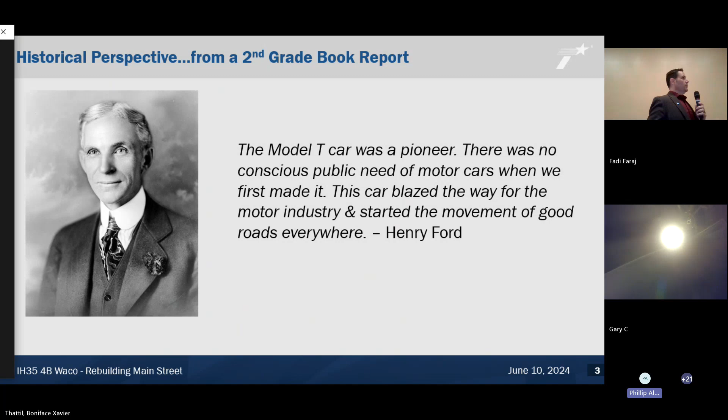So what does this have to do, what does Henry Ford, what does this book report have to do with Waco? Well, for me, my perspective has always been public side. It's been the pillars of transportation here, not only in Texas, but federally.

And if you look back in history, DeWitt C. Greer is regarded as the father of the highway system here in Texas, spending 54 years of his career working for TxDOT. Then you look at the Eisenhower administration in 1956 with the Federal Highway Act. Working for 10 years for TxDOT, I kind of leaned on the public perspective that these guys were the ones that really set the way for our transportation network.

But if you look back at Henry Ford, and at the Waco project specifically, the invention of the Model T had a transformative impact, probably just as great as those guys who worked for the government. Because the assembly line allowed folks to buy a vehicle back in the 1900s, it allowed them to do things they hadn't been able to do, like travel to places they'd never been, go on vacations they never thought possible, and in effect establish many more main streets across America than the railroad could ever do, or what horseback could ever do.

And that case is prevalent here in Waco, Texas. We took a trip there not too long ago to the Dr. Pepper Museum, and guess who pops up at the Dr. Pepper Museum? Henry Ford. Because of Henry Ford's Model T, the Dr. Pepper machine there in Waco was able to not only stay local, but used the automobile to distribute Dr. Pepper across the South, across the state of Texas, and turn into a very powerful company.

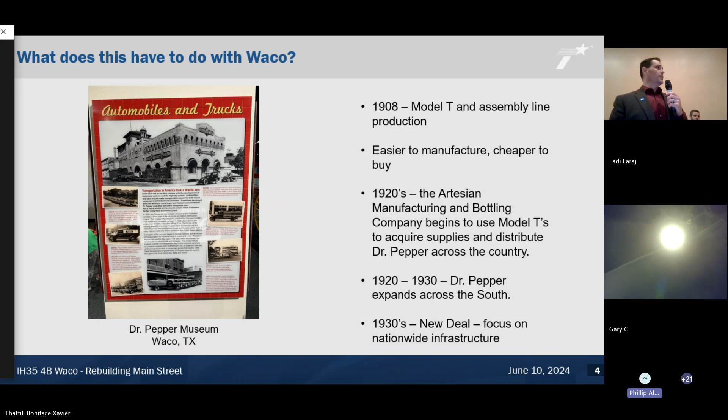So what does this have to do with 35 Waco? Well, in Waco, you have all these main streets now. The car has helped that come along, but 35 is Main Street, Texas. It serves as the major thoroughfare for travelers, for goods and freight, and for local commuters in cities and suburbs to travel all across Texas.

Waco, where it sits, is the heart of Main Street, Texas. It's right in the center of the state, and in the center of the population. In fact, where Waco sits, you're a 3 hour drive from anywhere you live in Waco. You're at 85% of the Texas population.

Tourism is huge in Waco. Approximately 1.8 million people visit Waco every year. In 2018, right before the pandemic, they hit a peak of 2.6 million visitors. A lot of that can be attributed to the Chip and Joanna Gaines empire that's there in Waco, and it continues to go strong.

But why does Waco become the heart of Texas? A perspective I never thought about is you had Henry Ford on the private side building vehicles, transforming America. And then you had people like Dwight Eisenhower and DeWitt C. Greer transforming America on the public side.

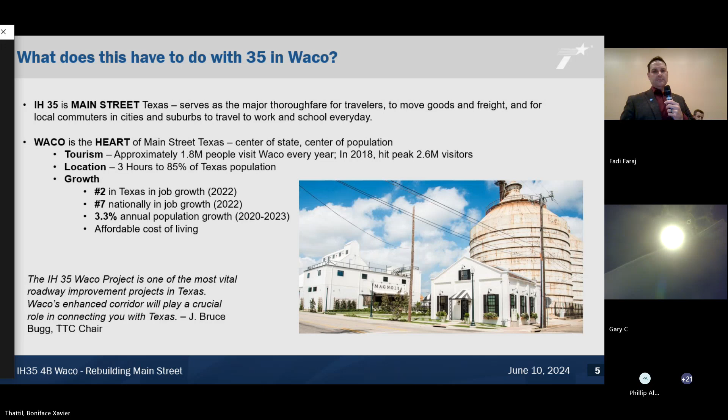It's amazing when you bring public and private together under a common goal, moving things forward, because when you bring them together it's unmatched. We can do anything possible when we both come together and work as a team. Because of that teamwork in Waco on the 35 4B project, we were able to be successful.

We started that job in April of 2019. We cut the ribbon and opened the facility fully in November of 2022. For those that work in transportation on a major interstate project, a little over 3 years is quite an amazing feat when you're reconstructing 7 miles of interstate from right-of-way line to right-of-way line.

That would not have been possible without the innovative approach from TxDOT and the out-of-the-box thinking from the contractor, the CEI, and all those involved with the project. Because we worked as one team, understood the mission, worked in tandem, and worked through challenges, we were able to finish that job 7 months ahead of schedule.

But to get there, we got a little innovative, and we had to have a contract. So I'm going to turn it over to Clayton. He's going to talk y'all through what that contract looked like.

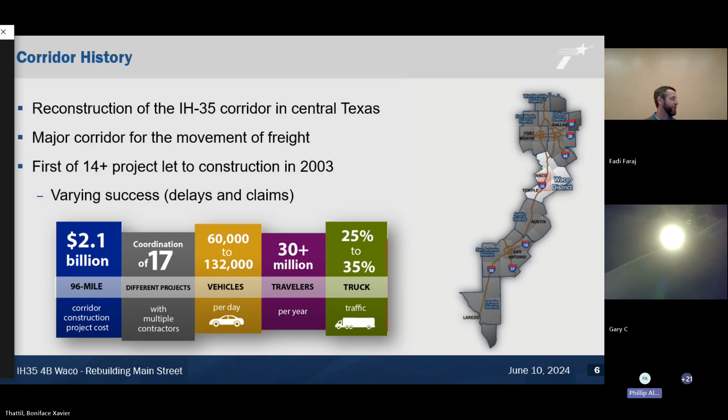I appreciate that. Sticking with the history theme, I wanted to talk a little bit about the history of I-35 through the Waco district. This has been an ongoing process for the last 20 plus years. You can see we've had 17 plus construction projects. I've had the privilege - or I don't know if privilege is the right word, I know Mr. Hutchins can attest to that - it's been some tough times, but we had varying levels of success over those 20 years or so.

That's kind of highlighted by this graph here. This is a summary of the major projects through the Waco district. The numbers highlighted in red indicate a 10+% increase in both cost and time, and you can see the vast majority of those jobs experienced that increase. As mentioned, I lived through the bulk of the ones you see in red, so I definitely took some lessons from that. But all in all, you're looking at a roughly 13% increase in cost across the corridor, and on average each project was looking at roughly 25% increase in time.

So knowing that, and then considering the importance of I-35 as Blake spelled out earlier, we were staring at 4B right in the face. And the district was bound and determined to not let history repeat itself.

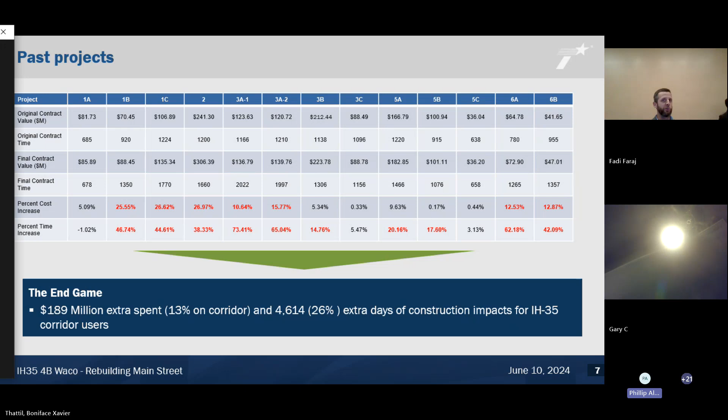Just some bullet points here: this section of the interstate was built in the 60s, so it was aging infrastructure, roughly 6 miles of interstate right through the heart of Waco. Got some major stakeholders, as Blake mentioned - Baylor, City of Waco, City of Bellmead - and we were looking at over 125,000 cars a day through the corridor. The scope of our project: going from 6 lanes to 8, 21 bridges were to be reconstructed, 13 different U-turns, and we were going to an X configuration with all of the entrance and exit ramps.

One of the key differences with this project that separates it from the others is this is one of the few that actually had all right-of-way in place and all franchise utilities relocated prior to the project. So knowing that, TxDOT had the opportunity to be a little more aggressive than they traditionally were with this type of project.

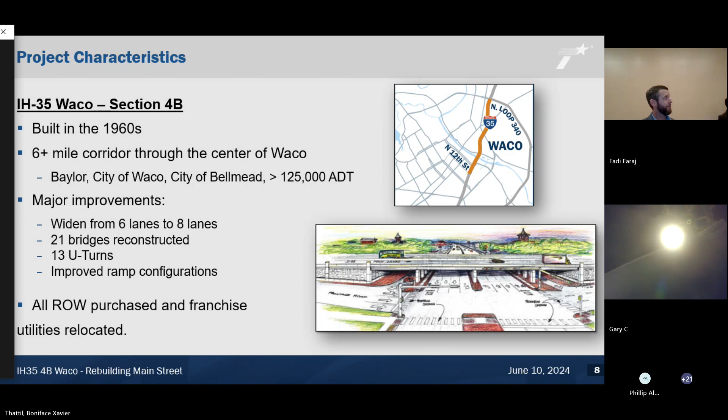So the district took some time, reviewed all the accelerated construction methods available from FHWA, and reviewed past projects. One thing that really stuck out was the cap of incentives and disincentives at 5% of the contract cost. Historically, the district was much lower than that, talking 1-2% tops, with really no major milestones, kind of focused on getting key intersections or ramps open instead of the big picture of getting the project done.

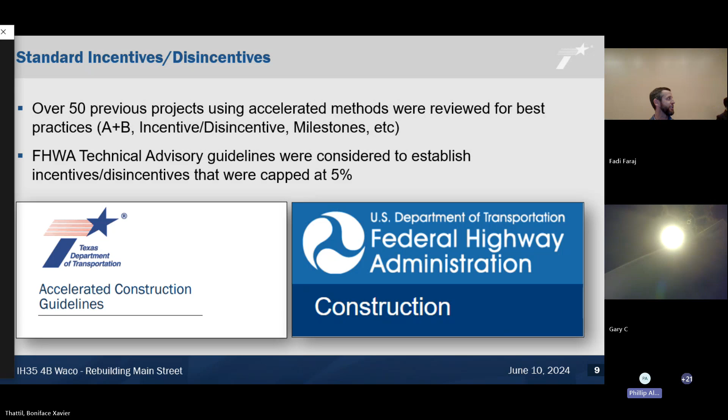So that got us to looking at the road user costs through this section. At $100,000 per day, that was an opportunity for us to set a road user cost in this contract that let the contractor really be aggressive with the schedule and really drive it.

Within the incentive and disincentive package, things we considered: although Waco is a major corridor, there's really no feasible alternate route other than Loop 340. Loop 340 is a 2-lane facility for much of the corridor with multiple intersections, so it wasn't really going to be a feasible route in the event of a major incident with 125,000 plus cars a day.

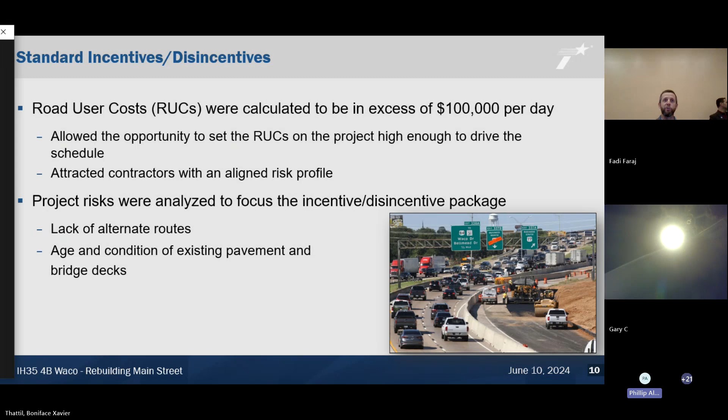As mentioned earlier, the age and condition of the pavement was deteriorating quickly. We were dealing with sometimes weekly pavement failures and bridge failures that were causing massive delays. So that was something TxDOT was really focused on - we had to get traffic off of that old pavement and onto new as fast as we possibly could.

I'll get to the phasing in just a minute, but there are 2 internal milestones we really focused on. One involved putting all 6 lanes of traffic reduced down to 4 on the existing pavement - that represented the highest risk to the department. The next phase was actually getting those same 4 lanes onto the new pavement, but again because of the reduced capacity, that was something we wanted to expedite.

Another thing we considered was adding a lane rental bank. We wanted our contractor to be as efficient as possible with lane closures, to try to combine operations and not just have singular operations that seem to string out night after night.

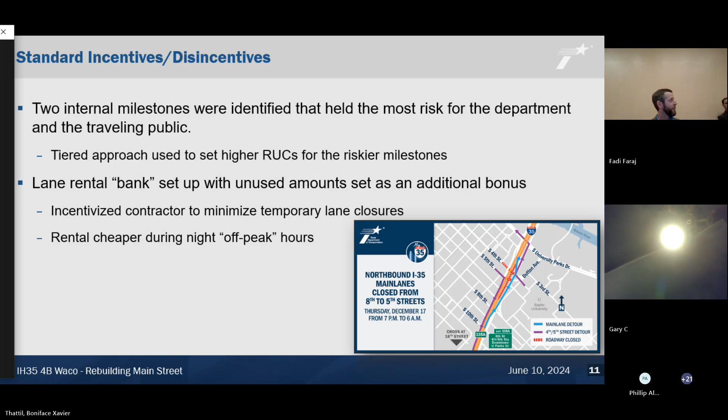So here's kind of the overall phasing of the project. On the left-hand side you can see existing main lanes, 3 lanes in each direction. The first internal milestone involves moving all traffic onto the old pavement, reduced from 6 to 4 lanes - that became milestone 1, or B1, as part of the contract. Milestone 2 is taking that same traffic and putting it on the newly constructed southbound main lanes while the contractor completed northbound, ultimately getting everybody opened up with 8 lanes on new pavement.

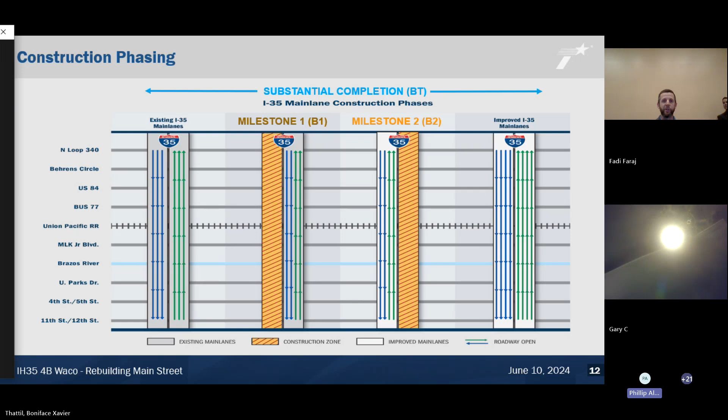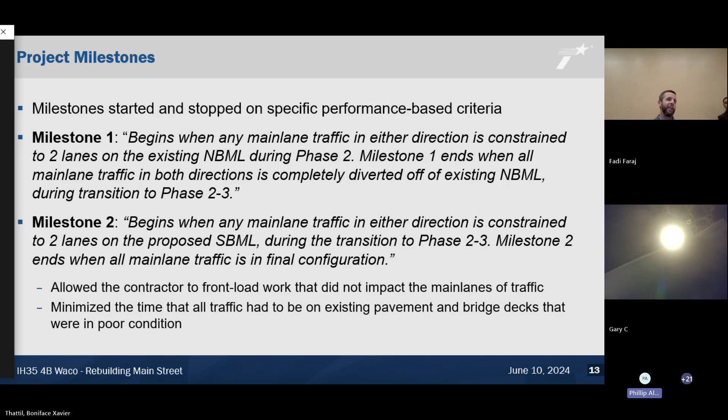One thing we looked at with this contract is some of the issues we had on past contracts - the milestones were very singular, tied to an exit ramp or an intersection, and were very narrow. We wanted to set it based on performance, which allowed the contractor some flexibility on the work they got done before actually triggering one of the milestones.

So I've got a graphic here that spells that out. I know there's a lot going on, but what we ended up with is project start on the far left-hand side, ultimately ending in project completion here. Within that you've got the start of milestone 1, which was putting traffic on old pavement, and the end of milestone 1. What we did is set up a no-excuse bonus for the contractor to meet that date.

But then what we also did is, 5 days either side of the no-excuse incentive, we had a no harm no foul time period. But should the contractor finish early - we actually had a 50-day window here where the contractor could earn an increasing bonus based on the road user cost for that particular phase.

So the same thing goes for milestone 2. Here you can see some overlap where once you move one direction to new pavement, that clock starts. And then same thing, you're set up with a no-excuse bonus for meeting that date, a no harm no foul window, and then a 50-day time period where you can earn a maximum incentive.

One thing to note is at the end of each of these phases we set up a disincentive that had no maximum. So while the incentive was capped, the disincentive continued until you completed that phase. At the end of the project, we had the same setup with substantial completion. You had a no excuse incentive, a no harm no foul window, and then a 55-day maximum incentive date. We set up 50 days from substantial completion to project completion to complete all remaining work, and then LDs would trigger at that point.

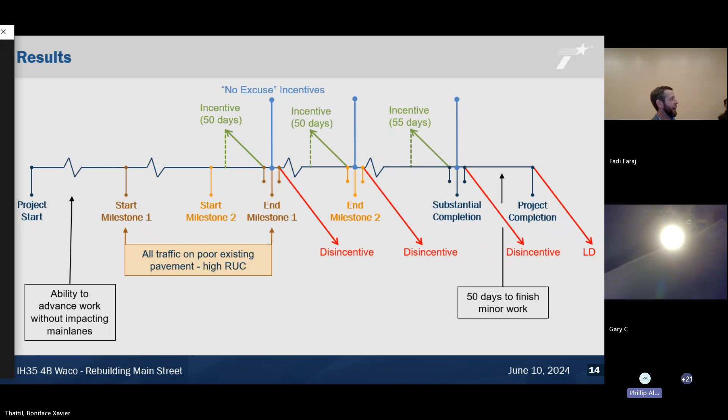Taking that graph and putting some numbers to it, this is what we ended up with. Milestone 1, being our highest risk phase where all traffic is on old pavement, we set a road user cost of $75,000 a day. That equates to a potential of 3.375 million in incentives, and I mentioned the no excuse, another 2 million on top of that should the contractor meet that date.

Moving into milestone 2, the road user cost goes down to $60,000 a day with a maximum incentive of 2.7 million plus another $1 million in no excuse bonus. One thing we did is if the contractor were to miss that first milestone, we rolled half of that dollar amount over to the next milestone. So if I'm the contractor and I miss milestone 1, I still have incentive to chase milestone 2 and keep the project on time. Same thing from milestone 2 to substantial completion.

Substantial completion was set at a lower rate, $50,000 a day, with a maximum incentive of 2.5 million and another 2.5 in substantial no excuse bonus.

The contractor could earn up to $1 million with the lane rental bonus. We started out with a bank of dollars for lane closures, and as the contractor closed lanes, we charged the hourly rates you see here. If they closed a lane during the day, we charged $20,000 per hour per lane. That would encourage the contractor to work in the evening when it was a much lower rate of $2,000 per hour per lane. Whatever was left in that balance at the end of the job, the contractor could get paid back in the form of a bonus up to that $1 million.

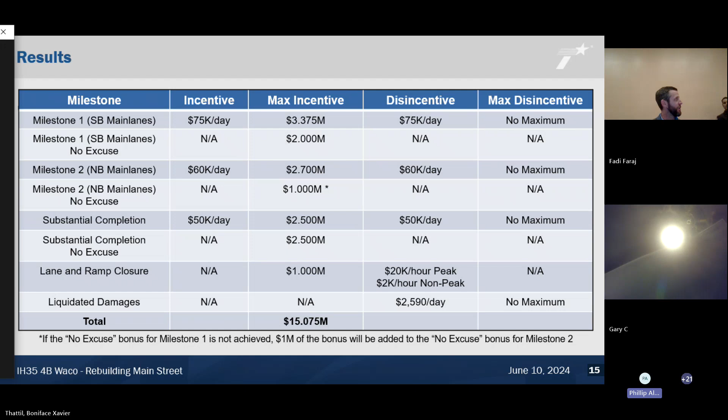So here's a look at what we got at the bid table. Webber was the low bidder on the project. One thing that's interesting to note is they were not actually the low bidder as far as cost to do the work, and they were not the shortest duration as far as getting the job done. However, they were the most aggressive with that internal milestone that was the highest risk value to the department, and that's ultimately what set them apart and got them the job.

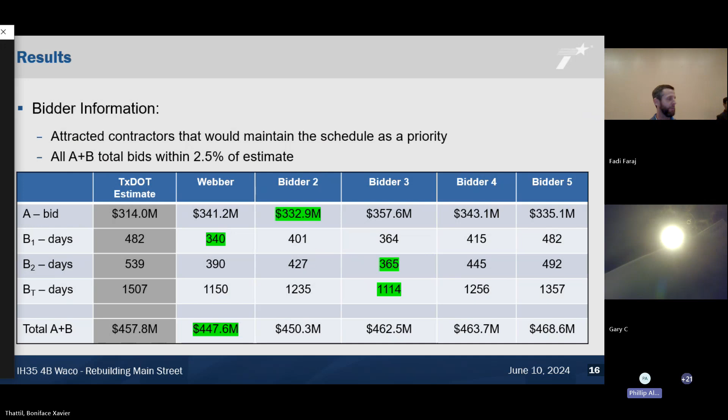So with that, I'm going to turn it back over to Blake, and he's going to go over some of the highlights of construction.

Thanks, Clayton. So yeah, now we've got a contract in place, we've got a contractor in place, got to go build a job. As in Chip and Joanna's show, we definitely started demo day without Chip on site. Oh, there it is right there.

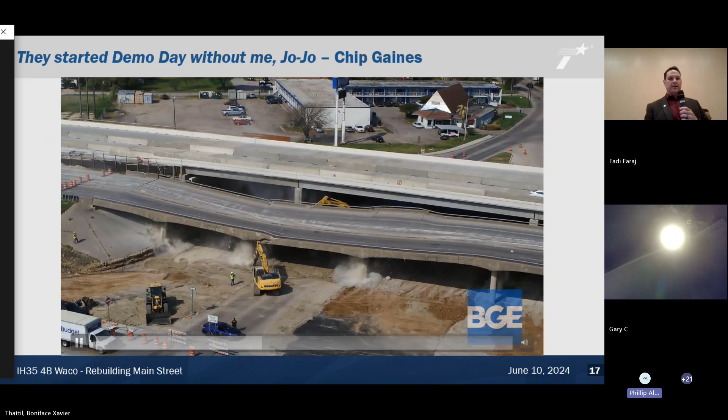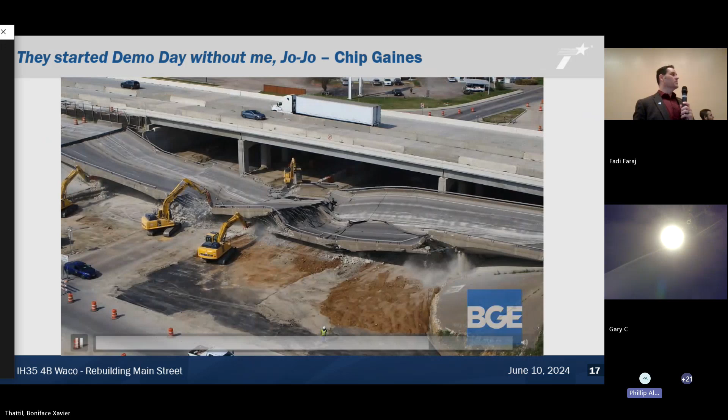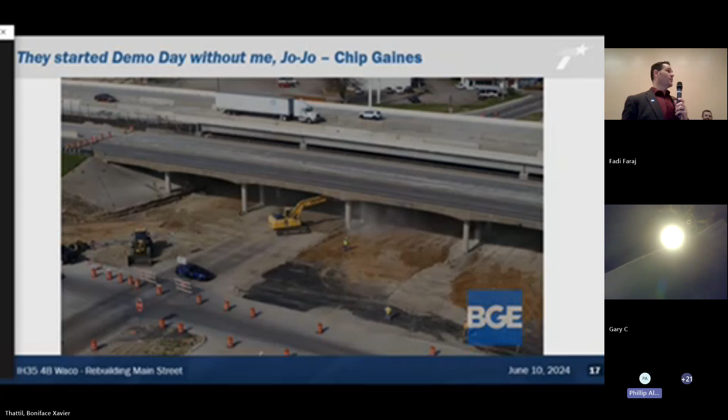So this is at Behrens Circle in Bellmead. This will be in the second half of the job. These pan girder bridges are very finicky when you take them down demo-wise, so it was important for us to have a good safety plan in place, a good demo plan in place. This bridge, believe it or not, probably took less than an hour to collapse. Just think about that. You've been driving over these bridges for years, and all it took was a little hammering for about 30 minutes to bring it down.

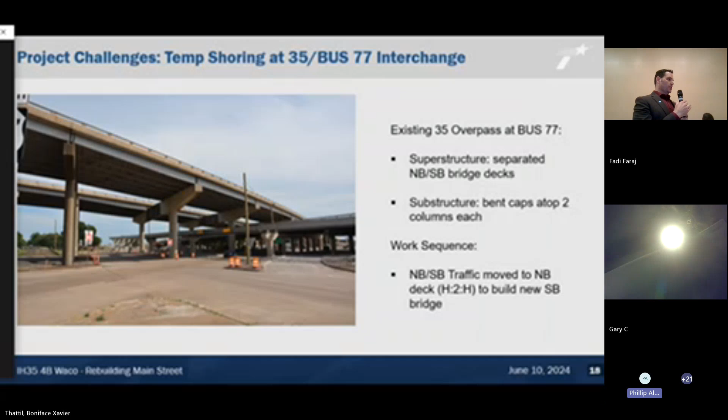One of the challenges to meet the milestones is focusing on the critical points of construction that we've got to get done. One of those key areas was the Business 77/35 interchange.

The existing interchange, if you recall, was more or less a 4-level interchange. You had your surface streets, then Business 77 elevated, 35 elevated, and a couple of direct connectors connecting 35 with 77. Here's the existing structure.

You see the bent caps here right within the intersection. Those are holding up both northbound and southbound I-35.

So we've got to flip traffic. We've got to get them into a head-to-head condition, build southbound, and get them all on the northbound bridge. We're going to need some kind of temporary shoring plan for this.

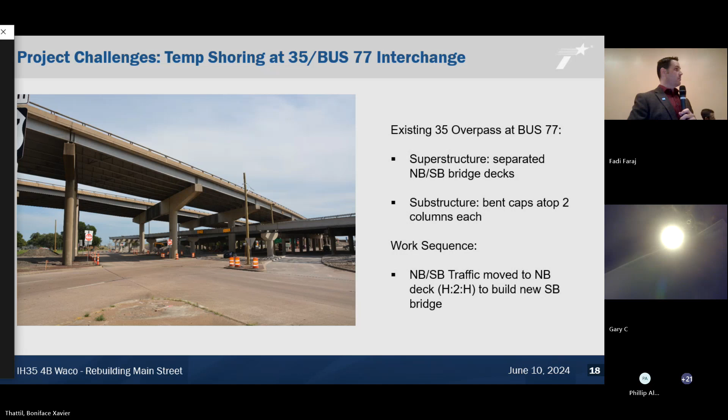The original design called for installing 2 columns to hold up the northbound lanes. The contractor reviewed this plan by the engineer and said, I don't know if I'm going to be able to do this. I've got some limitations — I'm going to need a specialty drill to put in one of those columns because it's directly underneath the existing deck that I have to keep in service. That's a very high risk potential considering that we're about to saw this thing in half and put all traffic on one side and pray to God that it doesn't fail.

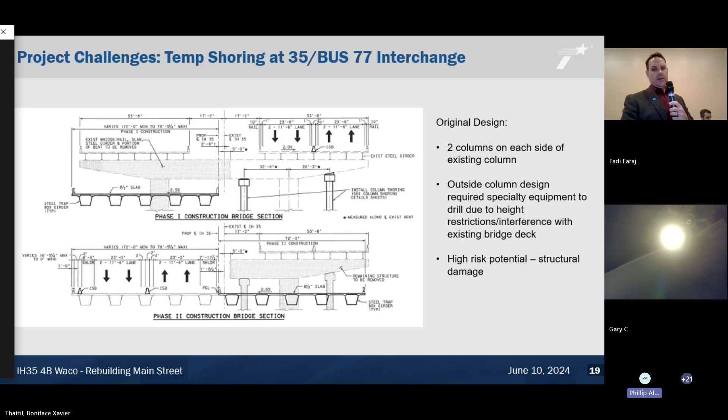So they came to us with an updated plan to change this out. The contractor proposed a pier cap design — a single column design with a pre-stressed system on it. Within this plan, the engineer noted it would handle compression forces with the pier cap setup and foundation, and the pre-stressing system would handle the uplift and transmit any tensile forces to the pier cap and then the foundation. This plan allowed for a standard drill rig to be used, and it expedited construction at a critical location.

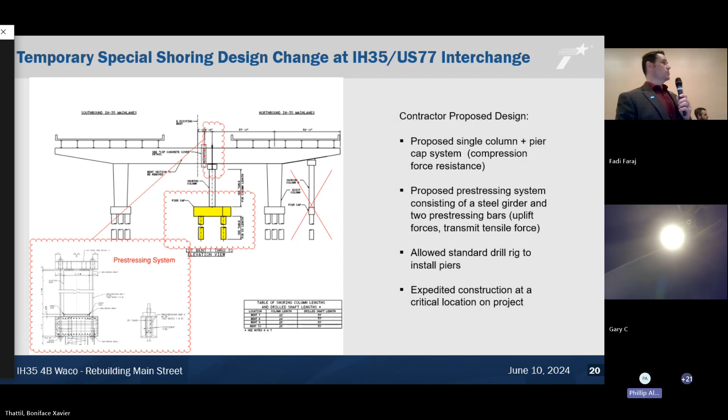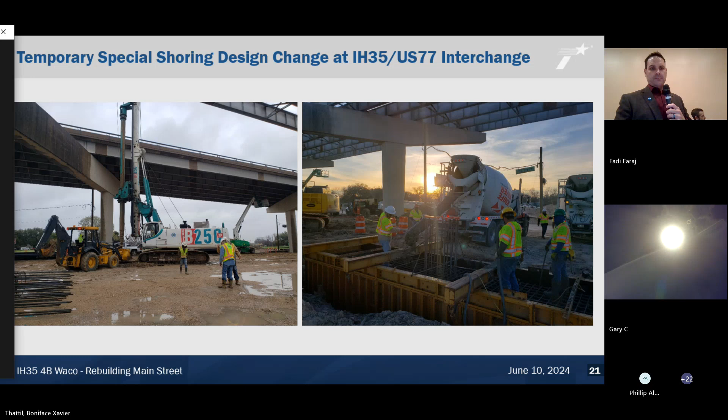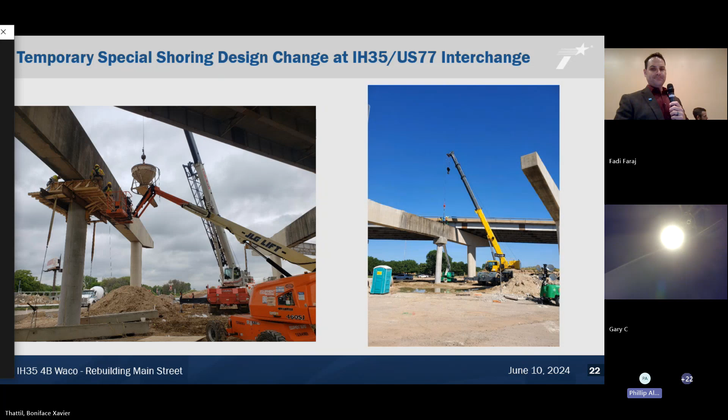Then we've got to stress those PT bars. We've got to follow the sequence and reach 280 kips. Our inspector here, Brandon, was over that, giving the thumbs up that they had met the requirements.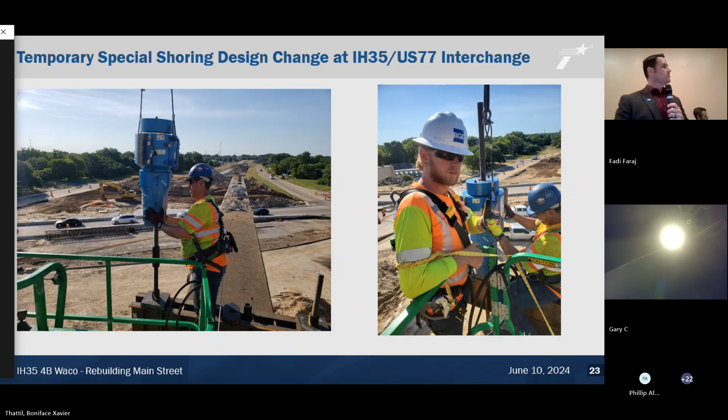So the night of the demo, once we got the shoring in place, there was a lot of concern with what could happen and how we should approach this. We were very detailed in our review of the demo plan.

This was a very nerve-wracking night. Clayton and I remember it well, because if this doesn't go well, all of 35 is down on the frontage road, and we don't know how long that might have been. Luckily, everything went off without a hitch — successful.

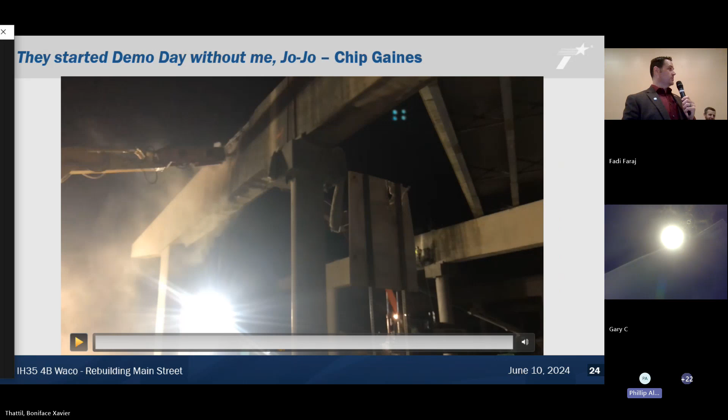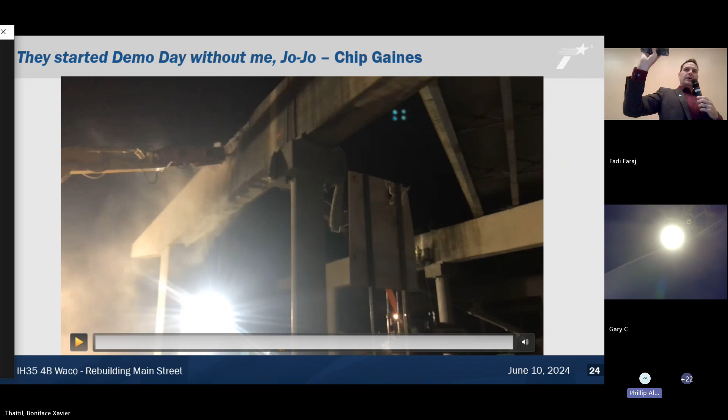I brought this — if you're a nerd like me and think things are cool, this right here is a number 18 rebar. This is very rarely used in highway construction. Typically you find it on a nice fancy bridge or building over the bay, right, Ryan? You don't find it in Waco, Texas. Well, it was there, and these guys were pulling it out right there at 77.

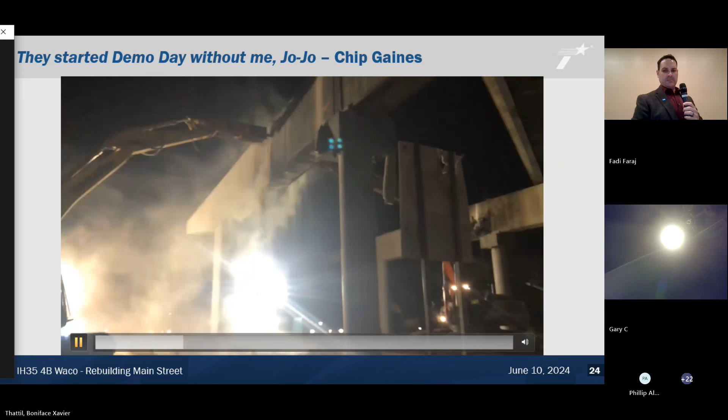So here's the aftermath — something out of an apocalyptic movie, as I used to say.

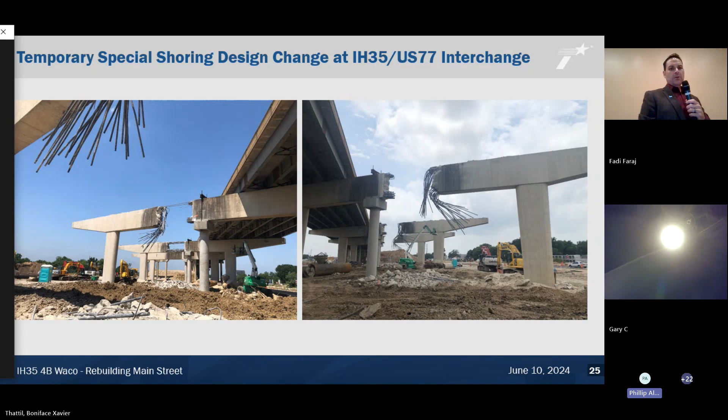One of the other challenges to meet the milestones, obviously, was building the new bridges over the Brazos River. Before we even got started, we had a lot of conversations about the different critical aspects, from an environmental perspective — how do we protect the river and ensure that during demolition operations and material placement operations we don't get anything in the river, and how do we protect recreational use on the river.

Believe it or not, we did have traffic control in the river during major operations to ensure folks at Baylor didn't get in a bind, or anybody using the river for recreational canoeing and so forth didn't get into a situation where it was unsafe. It's a very tight area.

The frontage road bridges had been previously constructed, and now here we are trying to take down existing bridges in the middle to build new. So a lot of tight area to put a lot of heavy and large equipment in.

And then work plan, you know, a lot of barge use was used. It was every day down there. It was like playing chess with different pieces. Those barges have limitations, so to make sure we didn't overload them, we made sure none toppled over and a crane went falling into main lanes or falling anywhere else. All that had to be considered before we even got started. And then concrete placement, you'll see some photos of that in just a second.

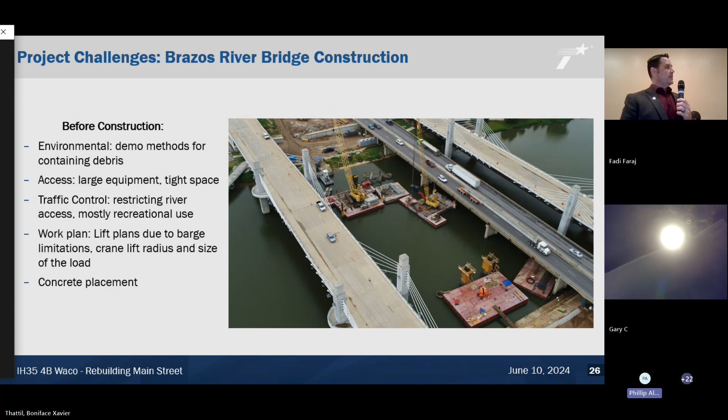So here we go again, we're demoing bridge. Weber used these barges, they would tie them up and connect them underneath the existing structures to capture all the debris falling. They'd use old traffic barrier to kind of square it off so it wouldn't pop off into the river. They did an excellent job. We had zero incidents from what I recall of getting any material or having any issues environmentally on the river.

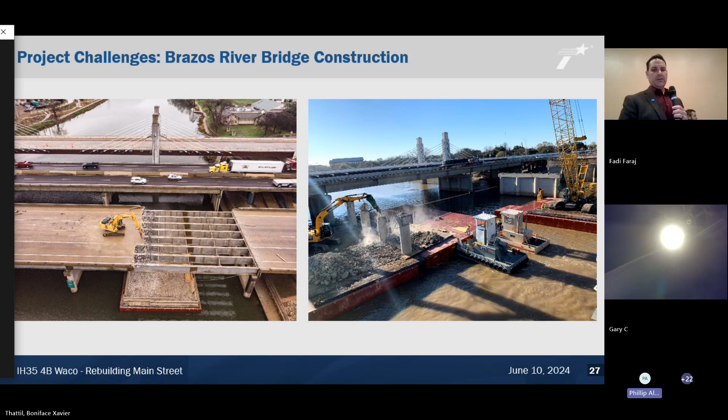Some other uses that we had, we used turbidity barriers to capture anything potentially that might get in as a secondary precaution. Another cool operation is to remove the existing shafts for the Brazos River Bridge. The plans originally called for scuba divers to come in, go down and basically torch the columns and then lift them up out of the water.

Weber didn't think this was a real safe way to do it and came up with an alternate demo method, and we wholeheartedly agreed. They came out with what I call a cigar cutter machine because it kind of looks that way. Binded it on top of each column, sent it down, and just chopped it off. So we removed a high-risk safety element during demolition.

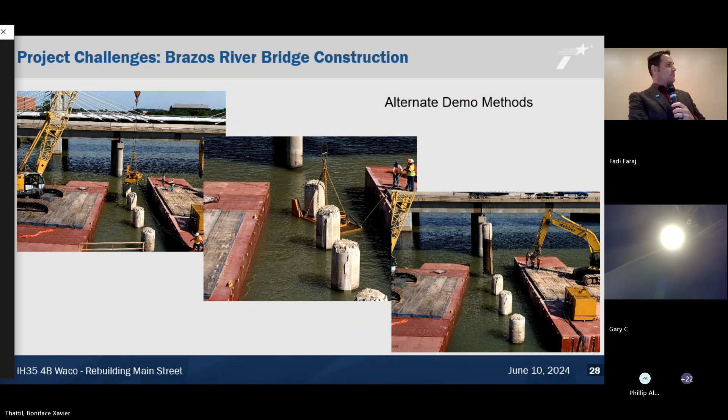Then during construction, some key challenges we faced was ensuring that bulkhead construction was done within the limits allowable on the barges, making sure those spud anchors that keep the barge in tow and in place didn't impact the existing bridges, and that we had plenty of clearance. We had special equipment on pump trucks to prevent any spillage into the Brazos River.

We had to continuously monitor the water levels. There is a dam-controlled situation on the Brazos River, not too far from 35. If we had excessive rainfall, obviously that's going to change characteristics on the river right here, so we continuously monitor that.

And then concrete pump setups, you'll see some pictures of that in just a second, but we had a lot of mass placements that occurred during extreme weather events. Webber actually used huge blowers to put in between the beams at one point to maintain temperature during deck placement.

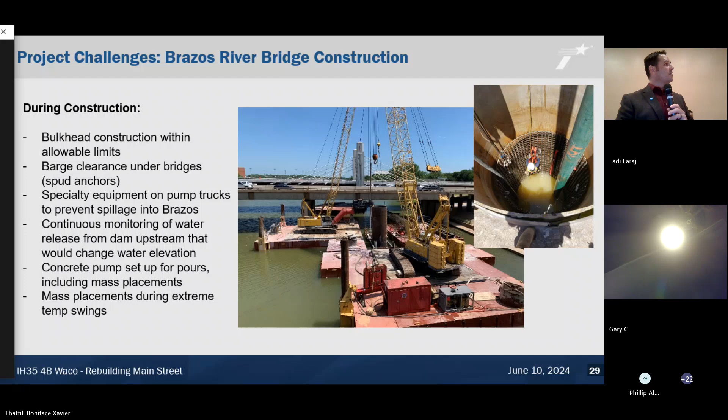Right here, we've got drill shafts going in the river. I have the scuba diver there on the right, maybe asking, well, you just said scuba divers weren't involved. Well, we ran into a problem at the river. We hit an unknown obstruction. Not uncommon, but not knowing what it is in very muddy water creates a lot of concern, especially when you're on a tight schedule.

So we made the decision to bring in scuba divers at this point to go down and investigate to figure out why the drillers couldn't get through this obstruction. Turns out we believe it was old equipment that either found its way into the river during a collapse situation off the bank several years ago.

We never really fully got the answer, but I think that's what we were leaning towards. But once we sent the scuba diver down, we had confirmation, and the driller was able to get a special auger out there to get through the rest of the material.

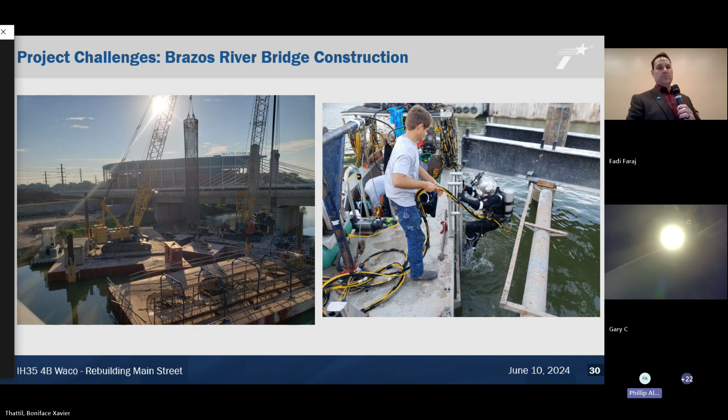Another challenge was getting these massive monolithic arch columns tied. The guys would do these on the barges and then lifting them up and putting them in place. You can see there we're pouring one at night right off the bank of the river, the pump truck.

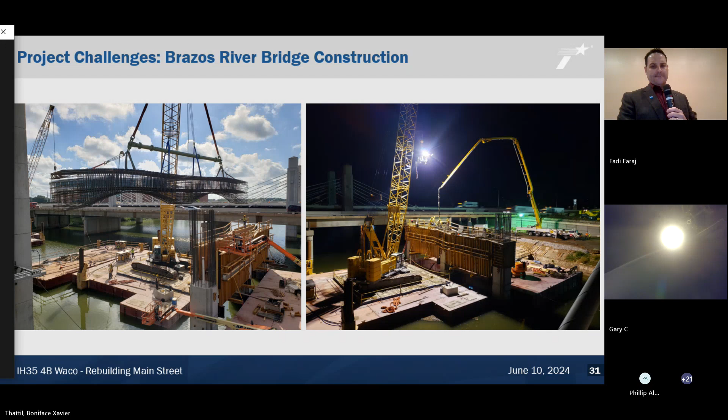Then we get into beam placement, and a very nervous situation here. We're in very tight right of way. We had to come up with a plan on how to get the beams out over the middle of the river. Essentially, the contractor would pull in beams off the highway right here, back them up, and then back them down this haul road over the bulkhead and angle them around the bent cap or the bent right there to get them on a barge to go set them out on the river. So quite the intricate dance.

And there's our Cheeto truck. This is one of our favorite pictures.

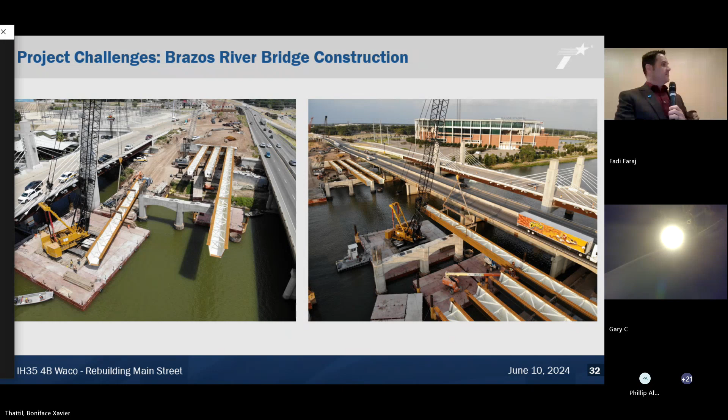And just some more photos of how we brought the beams on the barge and moved them out over the river to set them.

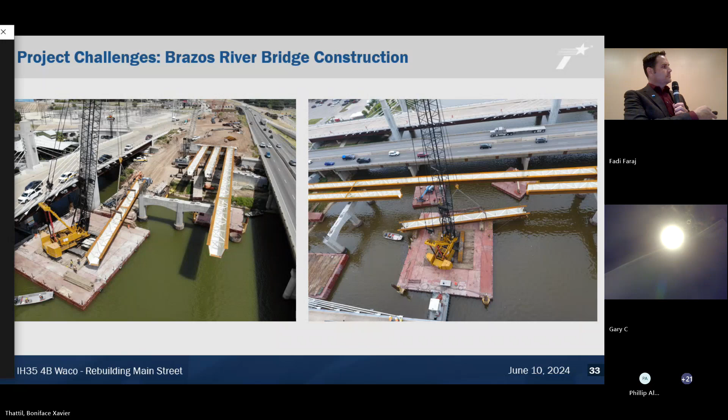This picture on the left was taken around March 2020. The picture on the right was taken at the end of summer in 2020. We've got our panels on.

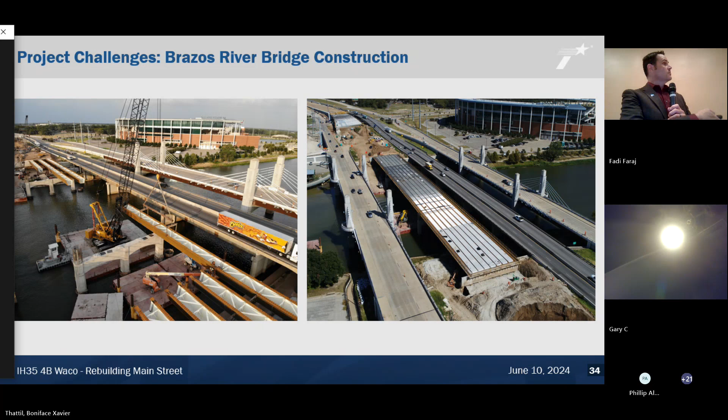Some other challenges we dealt with on the Brazos River: when we first got started with the demo, we discovered lead paint on the top flange of the existing girders. That was not planned, so we had to have environmental folks come out and clear those before we could proceed. We talked about the unknown obstruction. The other issue that happened during construction was when we were doing bolt installation on the steel girders, we were having a shearing failure issue.

So we had a huge meeting out in the field. We had TxDOT, we had the division involved. Turns out at that point we were probably the leading candidate to determine that we had a material problem in the state. We were getting shipments of bolts that were having this issue statewide.

That problem cleared up over a couple of months. I think they got the manufacturer on the right path, but all projects were alerted of the issue, and we had to step up our inspection to ensure each bolt was installed correctly.

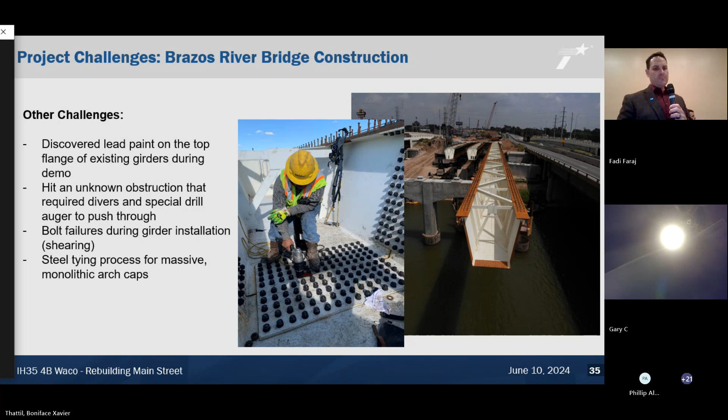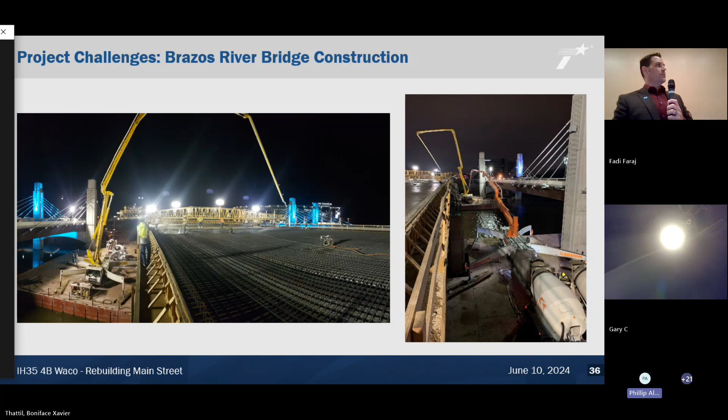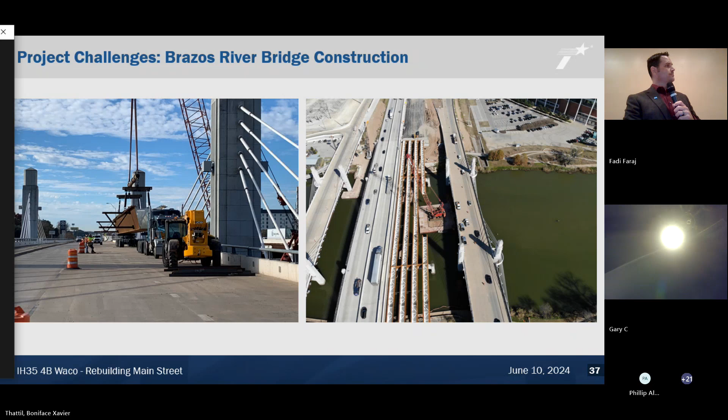Some last pictures here of the bridge setting. We've got the beams in place. Again, probably about a 6-month time period between what you see on the left and what you see on the right, as we were wrapping up construction in 2022.

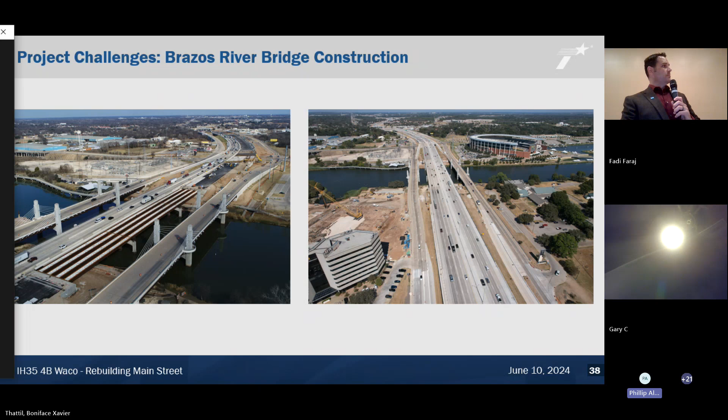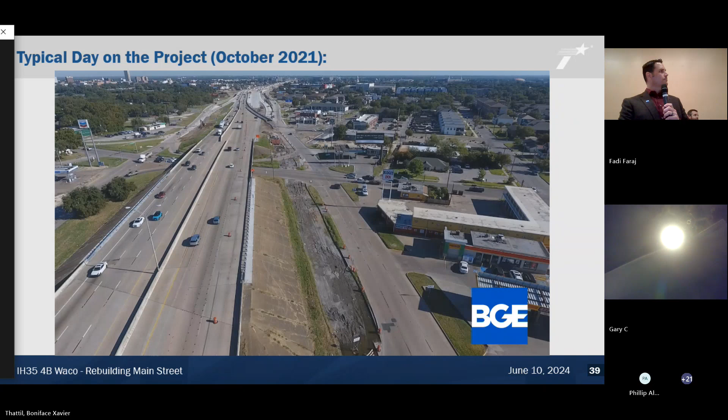Clayton, you want to talk about the results?

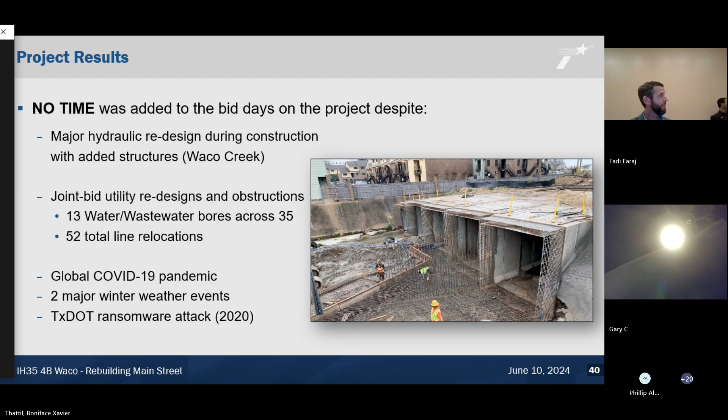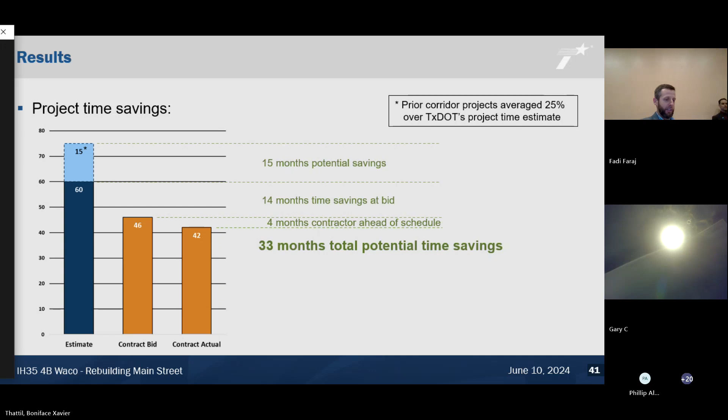So again, I wanted to take a moment and thank our partners: BGE, Webber, City of Waco, Baylor, Bellmead. We couldn't have done it without this group. At short course a couple of years ago, our district engineer said that in order for a contract like this to work, everybody has to have the mindset that the contractor is going to earn every penny of that incentive.

If you're not working towards that, it's not going to be a success. And I can honestly say that's what everybody you see here on the slide had in mind throughout the entire life of the project.

So again, here's just another testament to the effort and the teamwork. I think we've added a couple since then, but the project has actually won several awards because of the results and the effort put in. I just wanted to take a minute to highlight that.

That will open it up to any questions.

Question and a statement: not only have you won a lot of awards, this is the award of merit winner for ASCE Texas, and I'll be getting the award in Frisco this fall. But my question is, you said in spite of COVID—I thought COVID probably helped you, because didn't that keep the traffic levels down?

You know, it certainly lessened up some of the local traffic.

We got to take advantage of some of those lane closure hours as a result, and it allowed some closures that we normally would not have. So yes, it actually was probably a net benefit to the project at the end of the day.